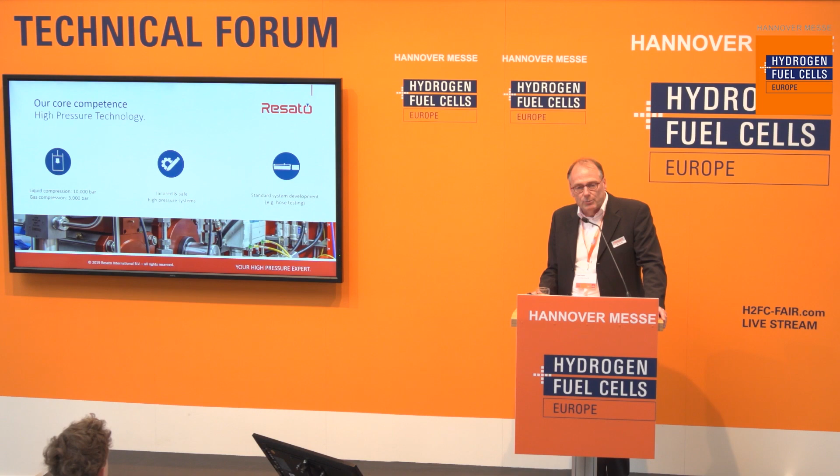Okay, I'm going to tell you a little bit about Resato and what we do in hydrogen and what we do in hydrogen testing. So about the company, we are a high pressure company. We do different things in high pressure. We go up to 10,000 bars in liquids and 3,000 bars in gases, and we make tailored systems for these high pressure applications.

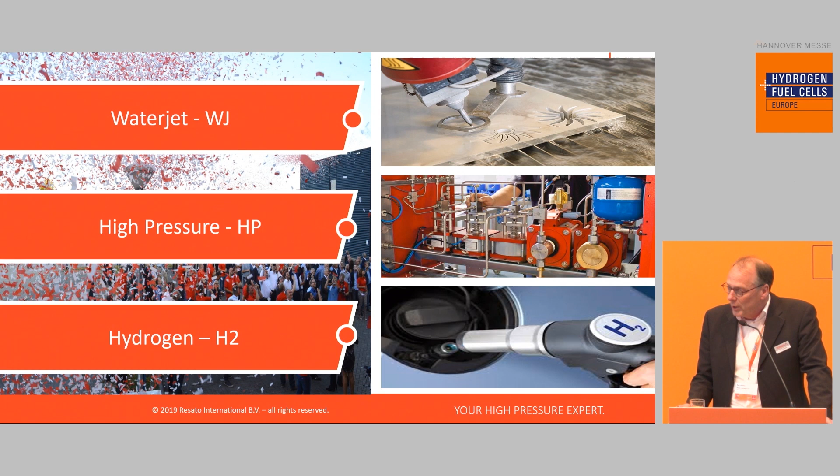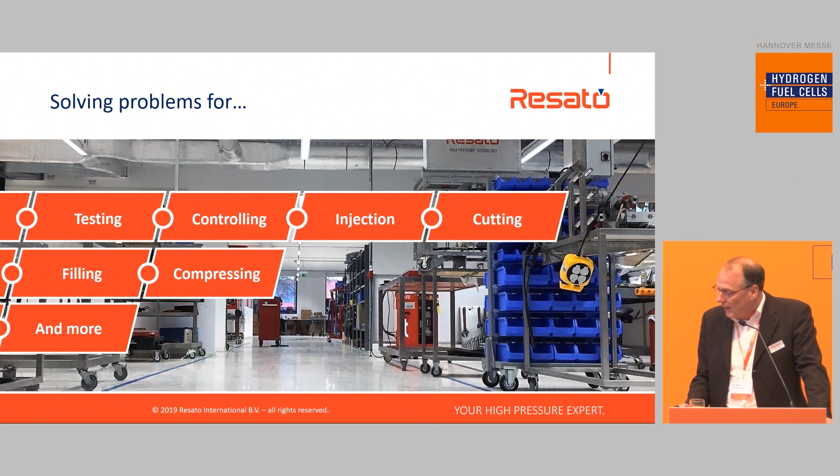We do it actually in 3 areas. One of them is water jet cutting, where we have production pumps running at 4,000 bars day in, day out. We do it in high pressure testing, also in the oil and gas industry, but also hose testing. Please visit us in Hall 21, where we have a booth as well. And of course in hydrogen, we do testing, controlling, injection, cutting, filling, and all kinds of stuff in high pressure, in all kinds of industries around the globe.

A little bit about the company. We started in 1991. We had about 100 people in the company working in 2018. We doubled during the crisis. And actually for this year, we're looking for a very rapid growth of the company, 37%, growing to 135 people. And this has mainly to do with hydrogen. We already have half of our target for this year in the pocket on January 1st, and it shows that hydrogen is really happening. It's not a promise anymore, it's really happening.

So what do we do in the hydrogen business? We actually have 4 parts that we offer to our customers. One of them is the compression technology, the boosters that you can put inside a fueling station or use for testing equipment. All kinds of ranges, from the lowest input pressure for our system at 2 bars, and the highest output pressure on hydrogen at 1100 bars for testing.

We also have a fleet owner station. We think for the transition, it's handy to have a product that is not too expensive, and you can fill your cars on your premises and get started with hydrogen. I was a little bit surprised about the PDC presentation that they mentioned it was over 400,000. We will do it for half the price. So come talk to us about that.

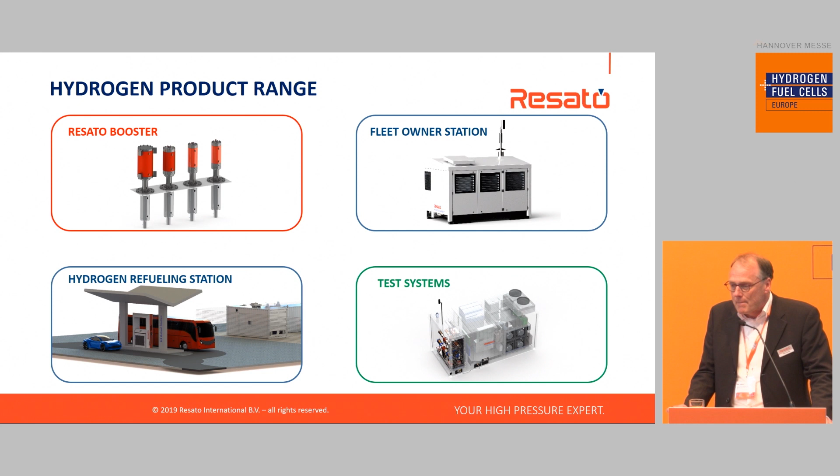Now basically, if you looked at the presentation of our colleagues at Maximator, they went through the types of pressure testings that you have. You have hydro testing, hydrogen testing, cycle testing, burst testing, and maybe some additional testing. But these are the 4 main ones that are all subject to worldwide standards of testing, and of course we implement those testing standards into our systems. Very necessary, of course.

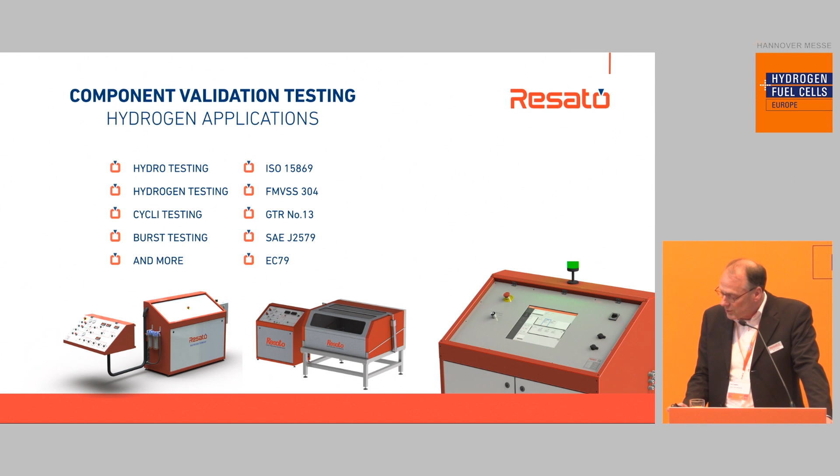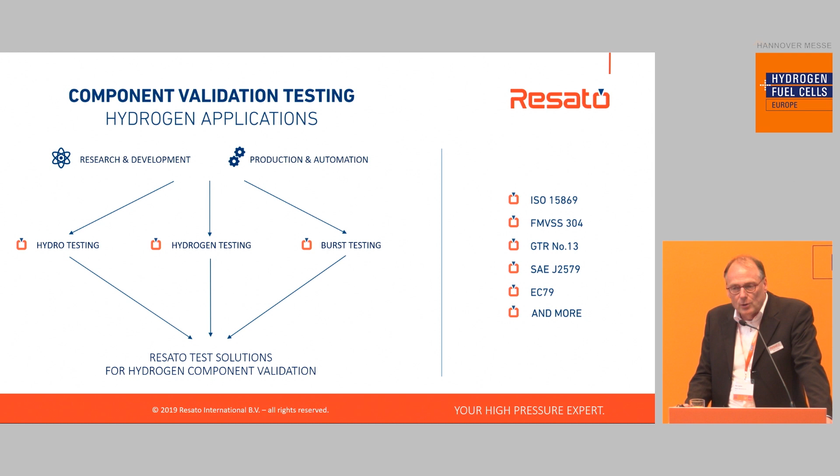So we actually have testing equipment for R&D facilities, but also for production testing. Again, you have really these 3 types of testing: hydro testing, hydrogen testing, and burst testing. Of course, burst testing is the most fun, you just blow it up, but you got to do it behind the wall. And we use all these types of tests for hydrogen component validation.

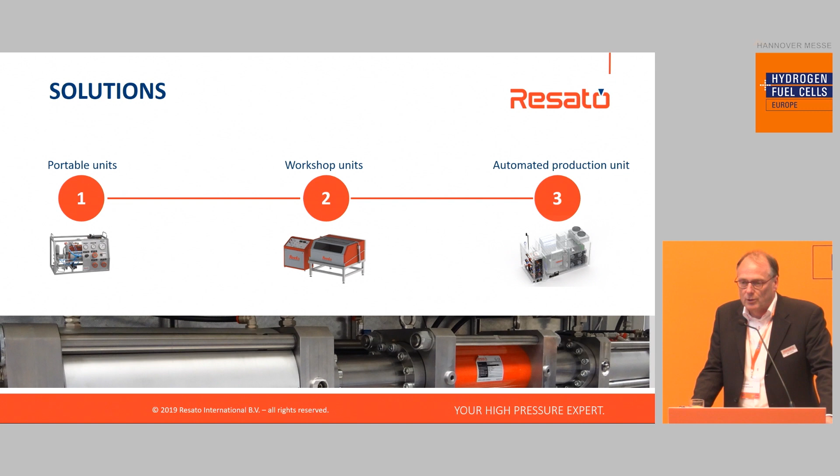So if you look at our product offering, it starts with very small portable test units where you can create pressure, air-driven, very handy, you can actually lift it yourself, to a little bit bigger units, up to containerized units for heavy production testing.

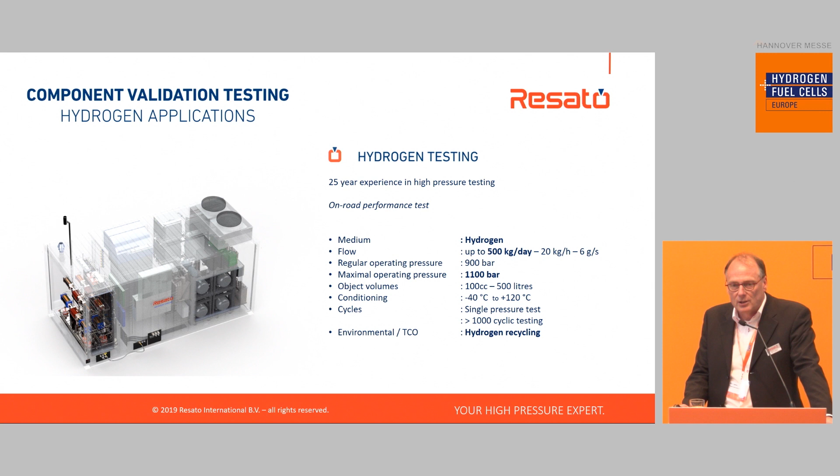So here's an application for hydrogen testing. You can find the specifications back online with the YouTube video, we won't go through that. But these are units that go up to 1100 bars, 1.5 times the operating pressure of the car at 700 bars, 1.5 times is 1050 bars. You need to do the component testing and validation.

Hydro testing could also be up to 2000 bars, but we can go much higher in liquids quite easily. We have systems up to 10,000 bars, not necessary for automotive, but maybe for some other applications.

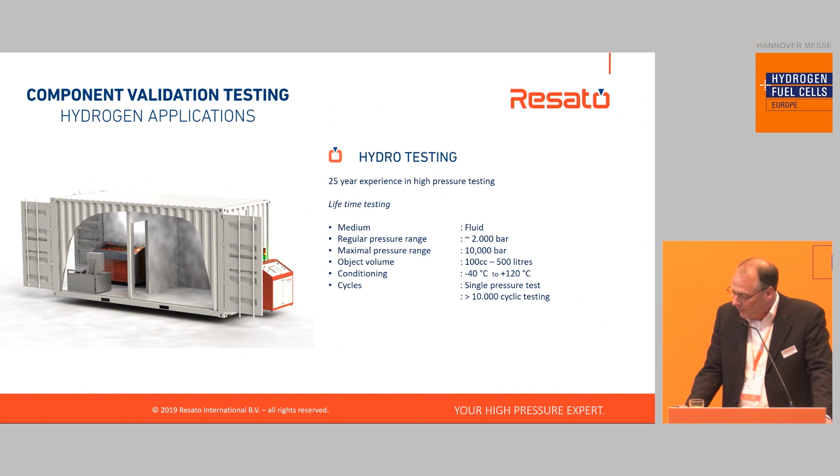And then the burst testing, also in a batch of tanks that you build, 1 out of 200 needs to be burst tested. You do that with the hydro testing basically, pumping it up until it goes, or until you reach your maximum testing pressure.

Object volumes from 100 cc to 500 liters. Of course, there's a lot of energy stored in the system, so you need to make sure that the pressure chamber you do the testing in is secure.

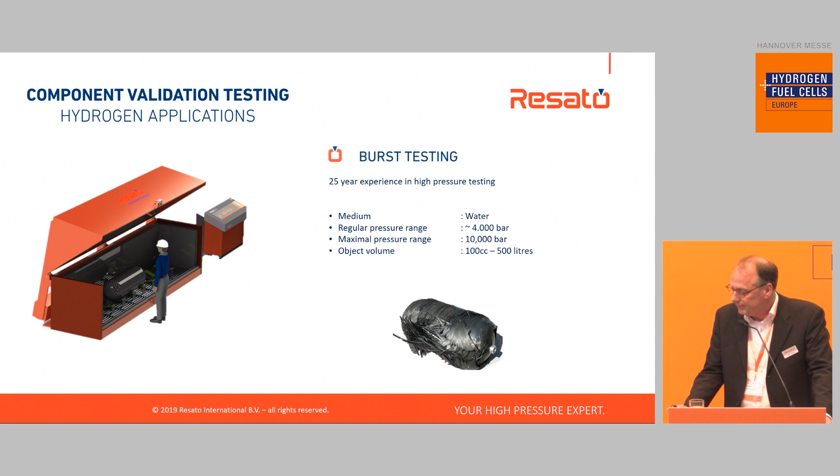This is an example of a system that we have running for thousands and thousands of hours at the Kiwa, a Dutch test facility. They do 1100 bar testing at 20 kilograms per hour, pretty much 24/7 during the testing of the machines. So these systems are up and running and doing well in the field, and we believe this can help everybody speed up their testing and make the hydrogen global economy work.

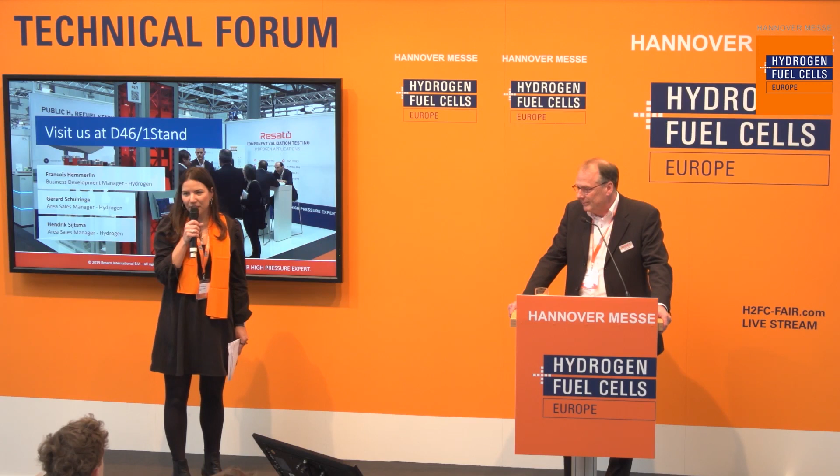Further questions from the audience? Okay, then I have another one. What is your prediction for the future for the fuel cell? You mentioned already in the beginning, a nice introduction. What is your prediction for the future? Where is the market heading?

I think it's going to happen, hydrogen. There's no way of stopping it. Our kids don't accept it anymore. I think there's a big brake on progress, and that is the business models of the oil companies and the automotive companies. If you envision that the maintenance on a fuel cell car is less than 50% on a diesel car or on a gas car, there's no interest on the automotive companies' side to change quickly. They're forced to change, but they don't want to go too fast. Same is true for the oil and gas companies. They don't make money on hydrogen, they make money on oil and gas. And they'd like to get the reserves out of the ground. So you see the politics, everybody is trying to be there but slow it down. And I think we should change that.